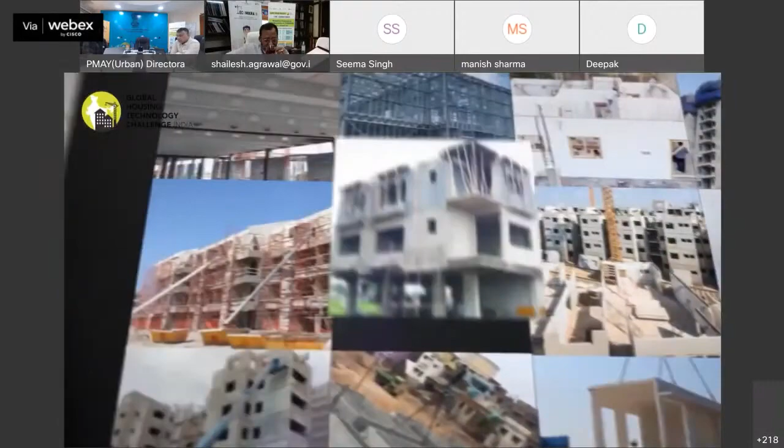Ministry of Housing and Urban Affairs, Government of India, has initiated Global Housing Technology Challenge India to identify and mainstream best available global technologies, so as to bring paradigm shift in the construction sector. 54 innovative technologies put in 6 broad categories were shortlisted during the challenge process. 6 lighthouse projects at 6 locations with 6 distinct technologies are being constructed. A lighthouse project using prefabricated sandwich panel system with 1024 dwelling units in S+8 configurations, along with all basic and social infrastructure facilities, is being constructed in Indore in partnership with the State Government of Madhya Pradesh. The Honorable Prime Minister laid the foundation stone of 6 lighthouse projects, including at Indore, on 1st January 2021.

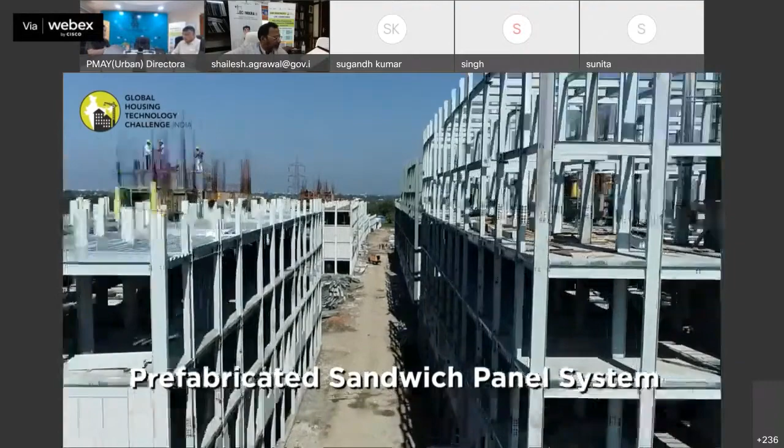Ministry of Housing and Urban Affairs, Government of India, has initiated Global Housing Technology Challenge India to identify and mainstream best available global technologies so as to bring paradigm shift in the construction sector. 54 innovative technologies put in 6 broad categories were shortlisted during the challenge process. 6 lighthouse projects at 6 locations with 6 distinct technologies are being constructed. Lighthouse project using prefabricated sandwich panel system with 1024 dwelling units in S+8 configurations, along with all basic and social infrastructure facilities, is being constructed at Indore in partnership with State Government of Madhya Pradesh. Honorable Prime Minister laid the foundation stone of 6 lighthouse projects, including at Indore, on 1st January 2021.

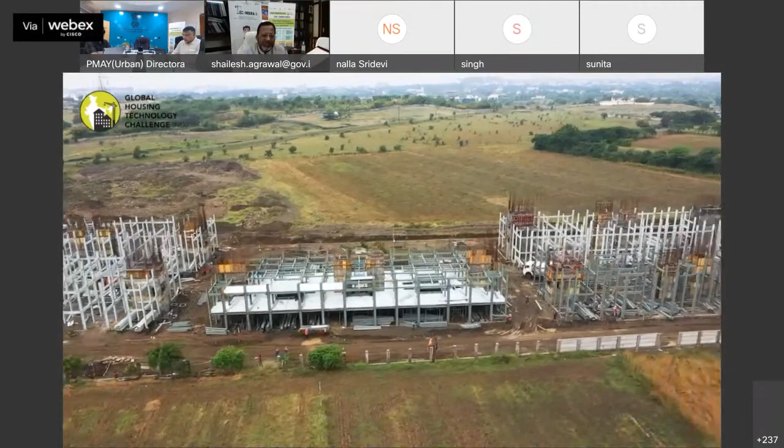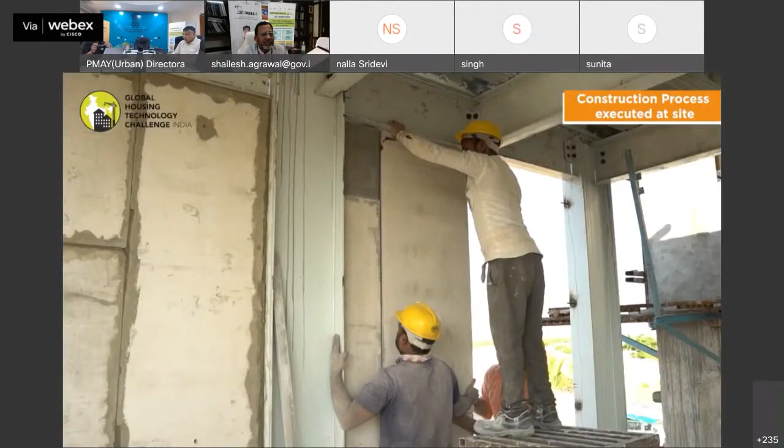In this system, the panels are manufactured at the factory in controlled conditions. Sandwich panels made out of cement or calcium silicate boards and cement mortars with EPS granules balls act as wall panels. These wall panels replace conventional brick masonry and can be used as load-bearing as well as non-load-bearing walls. The panels, having tongue and groove, are joined together for making the wall. These panels can be used both in RCC and steel frame structure. In Indore, the steel frame structure is being used.

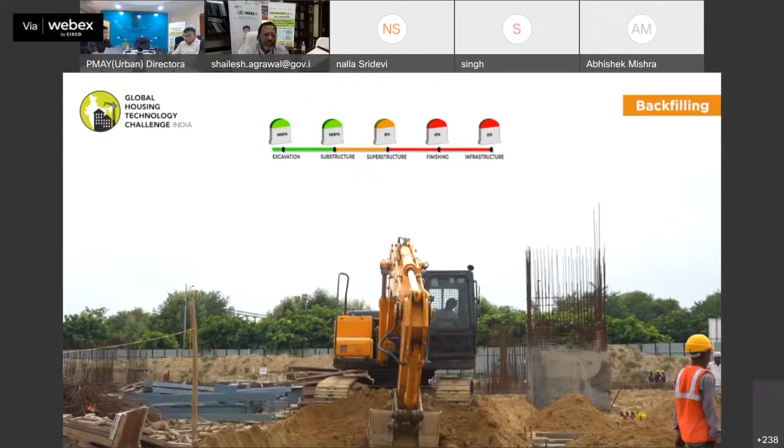Construction of Lighthouse Project Indore was started with excavation of site, followed by laying of plain cement concrete, footing work, erection of stem column as per foundation design, construction of plinth beam, and backfilling to complete the substructure. While foundation works were going on for all towers, the prefabricated steel components as well as sandwich panels were made ready in factory. Superstructure work started in all 8 towers sequentially, involving assembly of column, beams, placement of deck sheets, reinforcement including fixing of electrical and plumbing services.

Concreting of 40 out of 72 slabs have been completed. As the installation of steel structure progressed in different towers, EPS sandwich panels are also being fixed from lower to upper floor. Superstructure framework reached up to 6 floors in 4 towers and 4 floors in other 4 towers. Simultaneously, infrastructure work of drainage, sewerage, underground water tank, erection of compound walls, community center, solid waste management plant, electrical substation, etc. are also going on in full swing. A sample flat with all amenities is ready in Tower 3 for showcasing it to the beneficiaries and other stakeholders.

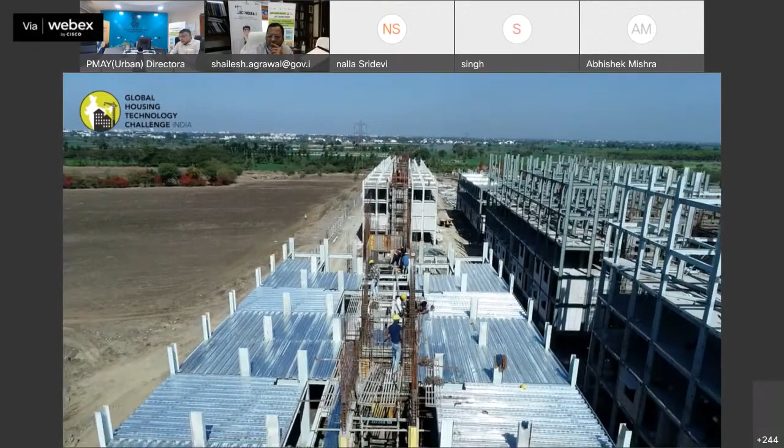The LHP Indore is serving as a live laboratory for learning and dissemination of knowledge. About 350 technocrats and other stakeholders have visited the site to learn the use of innovative technology in real projects at site.

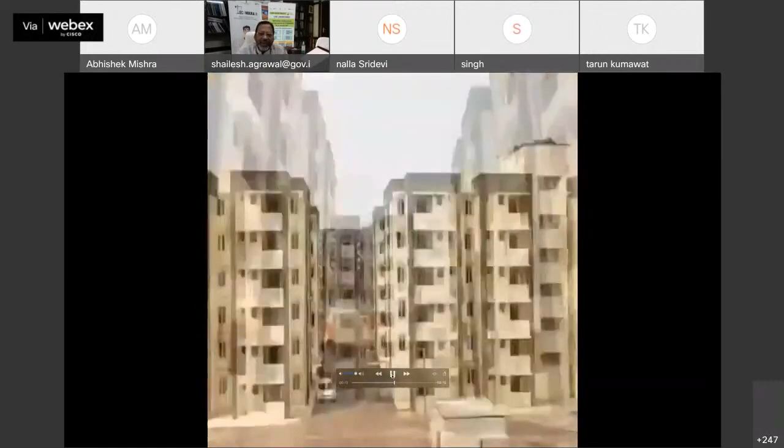This is the Lighthouse Project in Chennai, which was completed in March 2022, and just next week it will be handed over when we release it. The technology used here is the precast construction system, meaning all structural elements are precast components manufactured in a casting yard near the site, then transported and erected at the site. I wanted to show you the efficacy that this project is already completed and being handed over to the beneficiaries in a short span of 12 months, covering 1,152 beneficiaries. With this, let me go to my first lecture.

Let me share this screen with you, and I will ask Vikas if you are able to hear me. Yes sir, we can hear you, sir. Are you able to share? Are you able to see my screen? Yes, we can, sir.

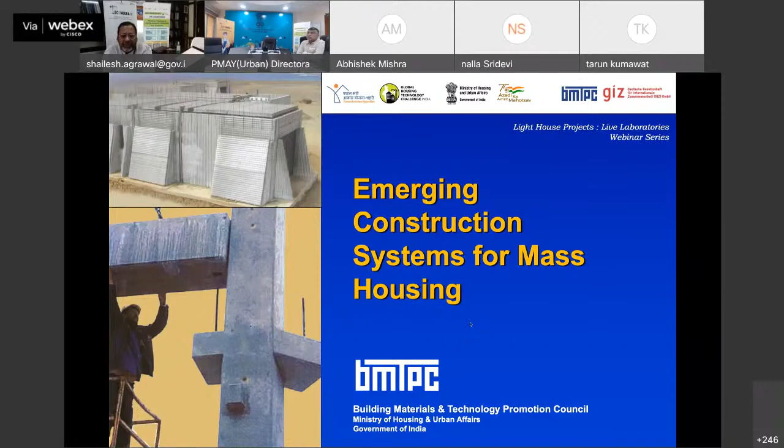So this is webinar number 8, and we are at the Lighthouse Project site Indore. The first lecture is on emerging construction systems for mass housing. I will tell you in simple language about the 6 broad categories and 54 construction systems which we have shortlisted.

This is because the entire Global Housing Technology Challenge India is being organized along with these Lighthouse Projects under Pradhan Mantri Awas Yojana, which has been a huge success. Out of a validated demand of 1.12 crore houses, already 1.213 crore houses have been sanctioned, near to 1 crore houses have already been grounded, and around 6 million houses have already been completed and delivered to beneficiaries. This is one of the largest housing programs ever undertaken across the globe, so we should all feel proud about the success of Pradhan Mantri Awas Yojana.

Under this Pradhan Mantri Awas Yojana, we were running technology sub-mission, and under technology sub-mission this Global Housing Technology Challenge was conducted, and now Lighthouse projects and technology promotion.

Also, through this Pradhan Mantri Awas Yojana, we were able to create several crores of jobs, direct and indirect. As shown in this slide, 213 crore person-days of employment was generated directly through Pradhan Mantri Awas Yojana urban projects, and indirect employment was of the tune of 475 crore, which is equivalent to 76 lakh direct and 170 lakh indirect, meaning more than around 2.5 crore jobs were created due to Pradhan Mantri Awas Yojana.

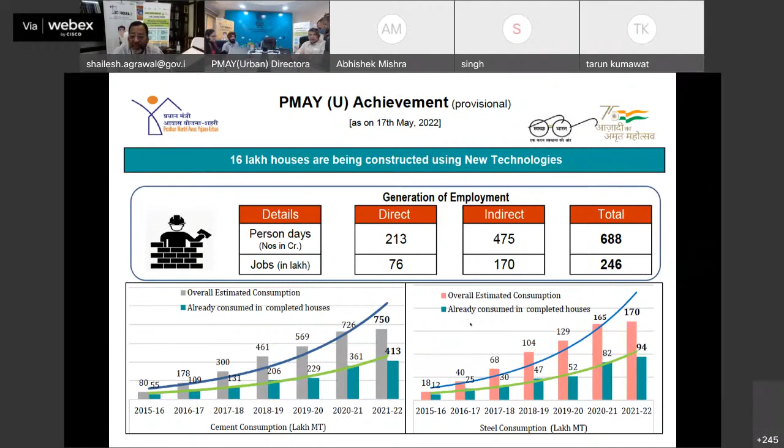Also, the bottom portion of this slide gives you the steel and cement consumption. The cement consumption by the end of this, when all houses are completed, will be 75 million tons, and steel will be 17 million tons. So that was about the Pradhan Mantri Awas Yojana statistics.

So you can just visit this website and get access to all this information, which will not be available otherwise.

Through this Global Housing Technology Challenge, 54 new construction systems were shortlisted, which are divided into 6 broad categories. I will try to explain you these 6 broad categories one by one.

One is 3D volumetric precast concrete construction. Other one is 2D precast concrete construction system. The third is light gauge steel. The fourth is sandwich panel system, also known as drywall construction. Fifth category is monolithic concrete construction, most of you might be aware of it, also called aluminum formwork system. And the last category is the stay-in-place formwork system.

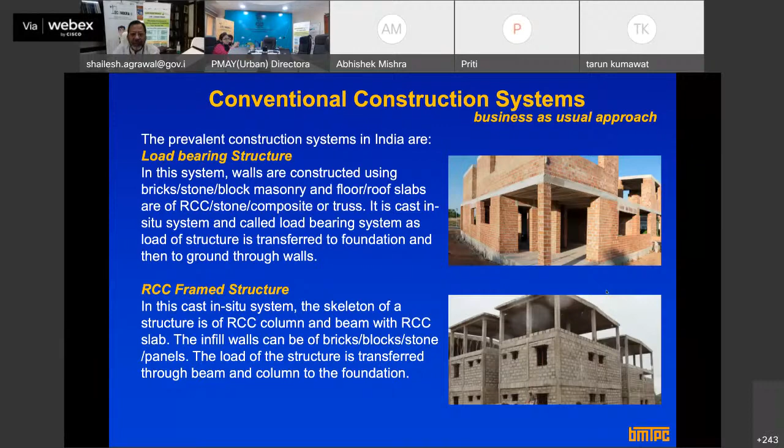First is slow. Most projects, whether big or small, struggle with completion—they are slow track construction. By using these innovative construction systems, you can fast track the construction process. Yesterday we were sharing that in Chennai, a project of 1,152 tenements normally takes 24 to 36 months to complete, but it was completed in 12 months. That's the fast delivery of houses—you can cut down construction time by more than 50%. The moment you cut down construction time, time is money, so you save a whole lot of money as well.

Second is maximum use of natural resources. When you are using red brick, cement, or steel, all these raw materials are based on finite natural resources. The way these materials are used at site, with no control or supervision, there is a whole lot of wastage. Whereas with innovative construction systems, majority of construction activities take place in the factory or under controlled conditions, so naturally you bring in efficiency, productivity, and optimally use your resources. That's why these innovative construction systems are called resource efficient systems.

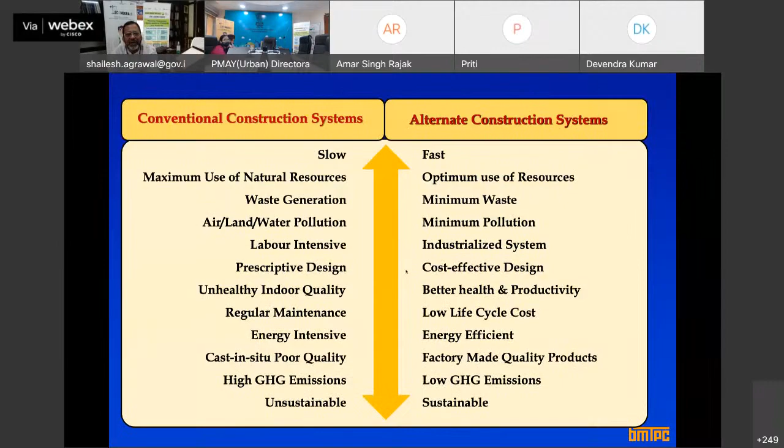So with this background, let me give you those six broad categories which I talked about, and I will try to explain them pictorially. I will show you through pictures what this means.

So first is 3D precast concrete construction, also called 3D precast volumetric construction. Let me explain these words. Precast means something which is not cast at the site, but is cast somewhere else, which can be a factory or a casting plant. So you make the entire room or entire module there.

It comes with different names - it can be the entire house, a module, a room, a toilet, a bathroom, or a small project. So the entire thing comprising of 4 walls, a slab and a floor is cast somewhere else, in a casting yard, and then brought to the site and put one over the other to create these building blocks.

That is why it is called 3D, because instead of making these walls separately, you are making this rectangular volume in the factory or casting yard. That is why it is called 3D precast volumetric construction.

I will show you that this technology we are using in LHP Ranchi. We already conducted a webinar on LHP Lighthouse Projects Ranchi. In the next webinar, if you are able to attend, you will see with your own eyes how these 3D modules are put one over the other to create this building block.

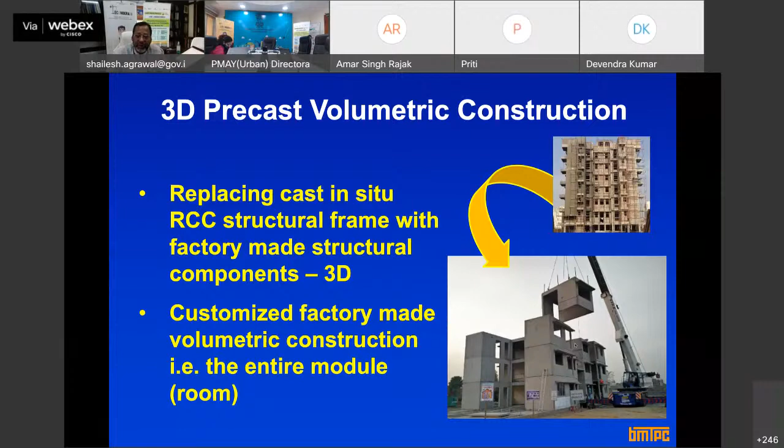Also, when we talk about these systems, people talk about joints and all. Let me tell you, all these joints are carefully designed through proper engineering and testing, so all these joints are monolithic - as good as the conventional joints in a monolithic system.

Through the Global Housing Technology Challenge, we could shortlist 4 technology providers. The project we are doing in Ranchi is being done by Magicrete Building Solutions, and this is the project. In addition, 3 other technology providers were shortlisted: Ultratech, Modocast, and Katerra.

This is essentially the process of 3D volumetric construction. First you create a mold depending upon your customized size, then put a reinforcement cage in that mold, then do the concreting. Once concreting is done, you remove the mold, and the module is ready to be transported to site, then placed on the already laid foundation or already laid slab. That module is kept and jointed through nut bolts and wet jointing - whole lot of jointing systems are available - and then you put one over the other to create multi-story buildings.

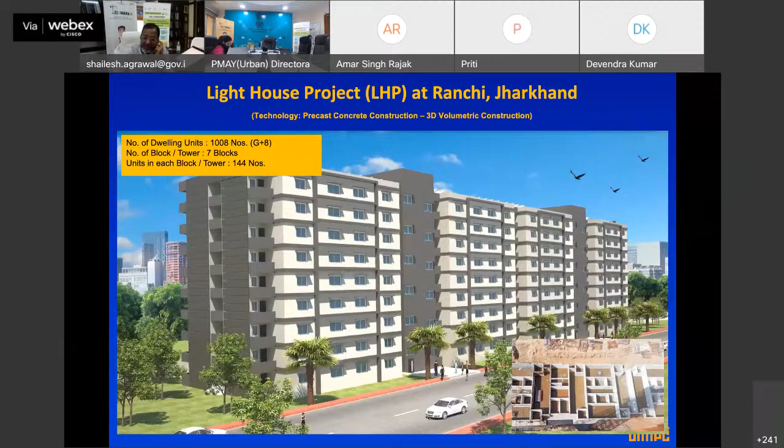This is the Jharkhand project I am talking about, and they have already created these 3D modules, which are being put at the site one over the other. This is that project at Ranchi. You can get details of this project by visiting the GHTC website as well. Now let's move to the next category.

Next category is similar to the first category. The only difference is there we were making the entire building, module, or room. Here, we are making all 4 walls separately. So walls, slabs, beams, columns, any structural element is made separately, and that is why it is called 2D. There we are making the entire volume; here we are making the planar element, meaning a 2D element.

So it can be facade, beam, column, or slab. These elements are made in the factory, and this is the technology used in the Chennai project. Just adjacent to the project site, they set up a construction casting yard, and in that yard, all these beams, columns, wall panels, slabs, and staircases were cast and then brought to site and erected, assembled, and through wet jointing, joined monolithically to create a monolithic structure. This is precast concrete construction system, and it is one of the most popular technologies in our country at present.

You can see here, name any element, you can have hollow core slabs also, just to reduce the weight of your walls and slab. So any element - wall element, solid slab element, this kind of spandrel with slab and parapet - you can have staircase, you can have wall panels. All these are being cast in the casting yard.

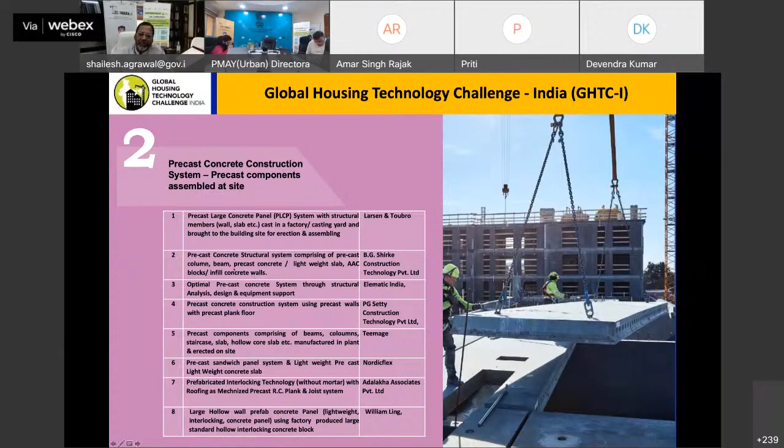All these details, if you want to get information about these companies - their emails, contact addresses, presentations - all are available on the GHTC website. So you can get access to all this information through the website. And this is the project in Chennai. I showed you the picture, and I showed you the small 30-second video also, and you can see how beautiful it looks.

1,152 houses in 12 months were constructed using this technology.

Let's move to the third category. The first 2 categories pertain to reinforced concrete construction, where concrete structural elements are precast, meaning made in the factory or casting yard. Now here, instead of RCC, we are using steel beams and columns. The only difference is steel beam and column, and that is why it is called pre-engineered.

You might have known this word pre-engineered. It means something done beforehand - not done at the site, but pre-engineered. Before, you decide everything, the sizes of columns and all, and then from the factory produce those columns and beams and elements, bring them to the site, and then erect them.

You might have heard this word used in industrial structures. Most industries use this pre-engineered steel structural system. Now we are trying to promote pre-engineered buildings in the residential sector for housing also, because the manufacturing and technology of steel has advanced, and now we have built-up sections that make it possible to have any kind of rectangular, hollow, or square shape, which makes it usable for residential construction as well.

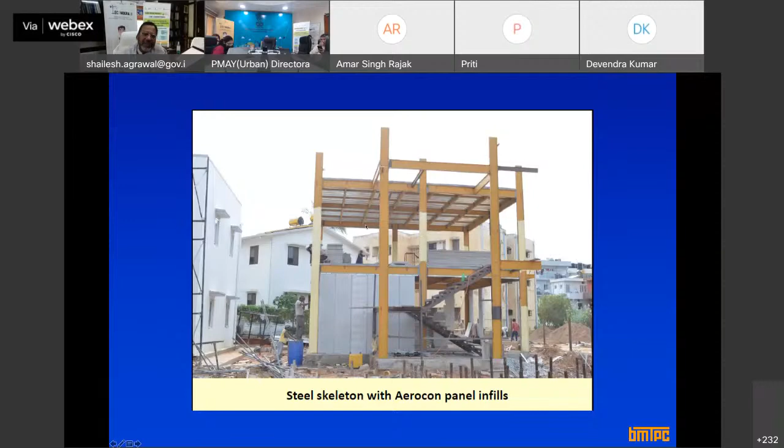So as per your requirement, suiting to your need, you can have this kind of wall. The idea here is that this is called pre-engineered steel structural system. We are replacing the RCC skeleton with this factory-made steel skeleton.

There is another category which we have clubbed with the first one I showed: steel pre-engineered structural system and light gauge steel structural system. This light gauge steel structural system is particularly suited to 4-story structures only. This technology is recommended only up to G+3 structure.

The difference between this and this is here you have built-up sections which are not galvanized. These are heavy sections, but here this is hot rolled steel. Understand, this pre-engineered steel structural system uses hot rolled steel, and here this is called cold form steel, which is very lightweight. So you have a very thin section, and these sections are galvanized. Galvanization means they are corrosion proof.

So these panels, what you see this white or gray thing here, are made in the factory, and being very light in weight, they can be easily lifted by one person. So you just put these panels one over the other, side by side, to create the entire wall. And in a similar fashion, you can also put them in the floor as well.

So this is called light gauge, but this is recommended only up to 4 stories. Although abroad it is being used up to 8 stories, in our country, looking at our geoclimatic profile, we have recommended only up to G+3 story.

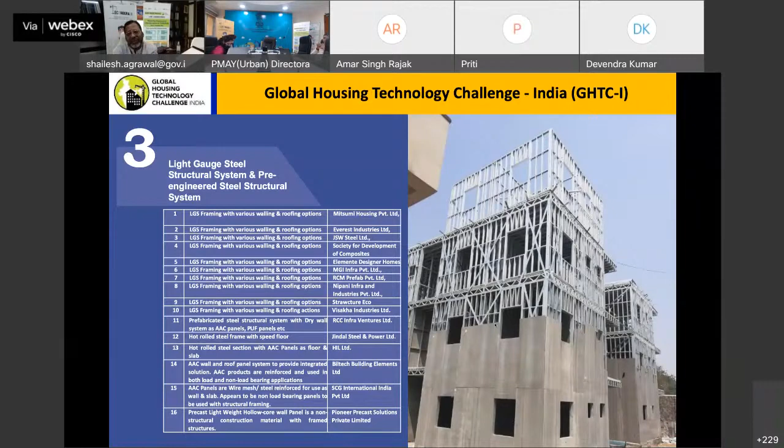And the hollow space in between can be left as it is, or it can be filled with any material. It can be rock wool, mineral wool, lightweight concrete, or a concrete of lower grade M10 or M5. Just to avoid hollowness in the structure, you can fill it with any of this material.

As I told you, this project is being done in Agartala, and what you can see in the right-hand side, bottommost, is that thing I was talking about. So that skeleton is of steel, and the wall panel is of light gauge, which you see here. 1,000 houses in Agartala are being made with this.

Agartala falls in seismic zone 5, and being in that zone, it is highly seismically prone, a very high damage risk zone. There, this steel structure provides excellent earthquake resistance, and light gauge steel is lightweight, so the lighter the weight, the better the seismic resistance. So this technology is quite useful and effective in places with high damage risk due to earthquake.

Let's move to the next category. This is also a very popular system in our country: dry wall construction.

You all know how walls are being made. What you see on the left-hand side is the wall construction in our country. If you are a civil engineer or architect, normally bricklaying is done either in English bond or Flemish bond, making a one brick wall or half brick wall. Then we first soak the brick in water.

Then we put a layer of mortar, then we put a brick, and that's how over a scaffolding and platform we create the entire wall. Then we do the plastering.

How about instead of making a wall like this, we get the wall made in the factory and just erect or install that wall at our site. That's called dry wall construction, and there are a whole lot of options available. I will just show you through pictures.

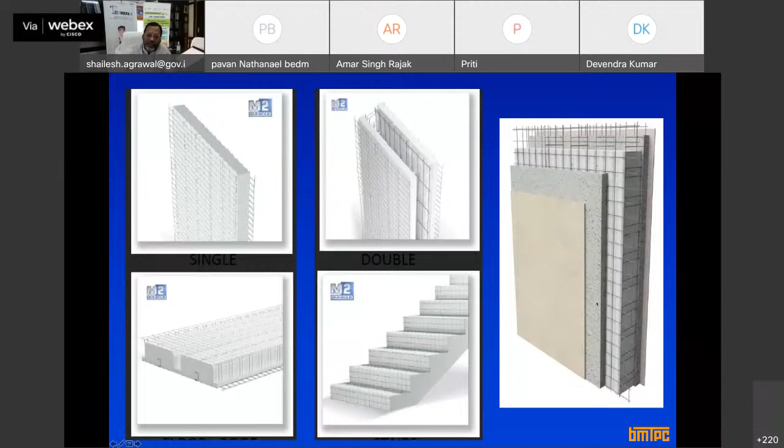There were around 9 companies which were shortlisted, and the project we are discussing today is being done by Rising Japan in association with KPR Projects - this is the technology we are using. So instead of this EPS core panel, what we are using here is wall and slab with EPS cement sandwich panel.

EPS sandwich panel system means the concrete we are using in the core is lightweight concrete, made of EPS beads, fly ash, and cement. This is also known as aerated concrete. So it's a lightweight concrete which is sandwiched between two calcium silicate boards. In fact, I will explain this technology to you in detail.

This is the technology we are using in Indore, and the Indore structure is G+8. This is used as an infill wall, and the structural skeleton is steel - RCC steel beams and columns. This EPS cement sandwich panel can also be used for load bearing application, but only up to G+1 story. In addition to this technology, there were 8 other technology providers which are listed here.

You can see Bhargav Beardsell. Beardsell produces EPS core panel. Bhargav produces EPS sandwich panel system. Then there are other host of companies which are into this EPS core panel systems.

And this is that Indore project. I will be discussing this in detail. So this is that panel which you see on the left-hand side - this is an EPS cement panel. Why is it called EPS cement panel? Because the core is of EPS concrete, aerated concrete. So that core is aerated concrete, and on both sides you have calcium silicate board.

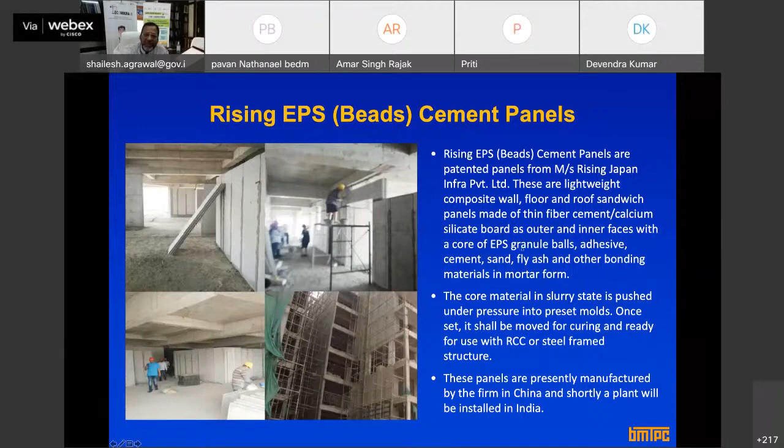These are lightweight composite walls, where you can see floors and roofs - sandwich panels made of thin fiber calcium silicate board on both sides, and the core is of EPS granule balls. So this is EPS beads, then cement, sand, and fly ash. Okay, let's move to the next category.

Next is, some of you might be knowing, Mivan system. Mivan was the name of the company which started this formwork system here. Otherwise its proper name is aluminum formwork system, or we have given it another nomenclature, monolithic, because this kind of formwork produces a monolithic construction. That is why it is called monolithic concrete construction.

This system is also one of the most popular systems in our country right now. Most of the projects being done by developers, real estate developers, are being done with this kind of formwork system.

This formwork system is nothing but, in a typical construction of RCC frame, what you have is formwork for columns, beam, and slab. So formwork, it's a formwork of steel or plywood, which gives the form to your concrete. If you want to create a vertical element of column, you put a formwork, rectangular formwork, and then put a reinforcement cage and do the concreting, and then remove the formwork. And then similarly for slab, and for beam and slab, you put that formwork and then remove it.

So instead of making these beam, column, slab separately, what about making the entire building together by putting the formwork for the entire module or for the entire room together? That is called monolithic concrete construction or aluminum formwork.

This is a customized formwork which is made in the factory. Depending upon your project, first the project requirements and the layout and plan of your project will be considered or studied, and based on that, this formwork is customized and manufactured in the factory. Then it is brought to the site, and you put the reinforcement cage and do the casting in a single pour to create all 4 walls and slab together. So the entire room can be made in one single pour by pouring the concrete in one go, and then on the third day, nowadays in 3 days, you can remove this formwork and go to the next floor.

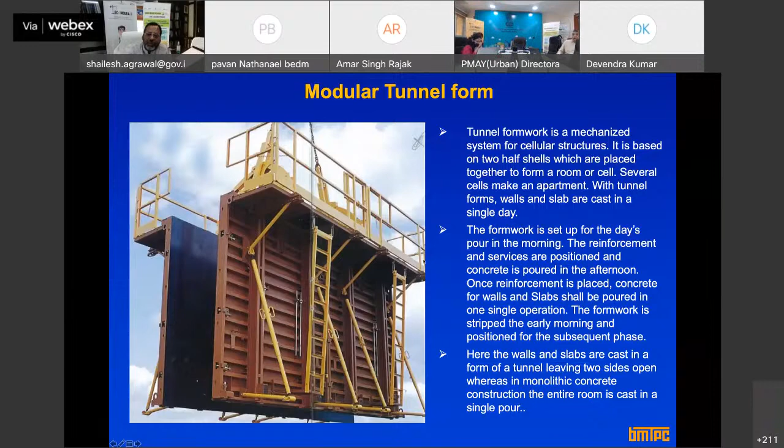So you put reinforcement, then the walls and slabs are cast together, and the outer walls, smaller walls, are filled with infill walls. This is called modular tunnel form, and is being used in LHP project at Indore and at Rajkot. Now let's move to the last category.

The last category is also a kind of formwork system, but it is called stay-in-place formwork system. You all might have understood by now what I mean by formwork system. Typically it means that you put formwork to create a particular shape, whether it's a beam or column, and then later that formwork is removed. But what about when the formwork is left in the structure, or stays with the structure to later act as part of the structure? Then it is called stay-in-place formwork system.

So the earlier formwork is just used to give form or shape to your building elements, beam or column. Here, the formwork is used not only to give shape to your wall, beam or column, but it also stays with the structure to later act as part of it, and that is why it is called stay-in-place formwork system.

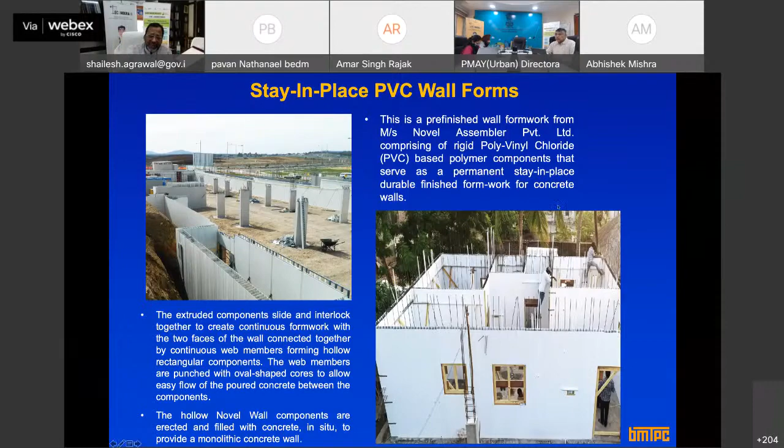This is that project I was talking about in Lucknow. What you see in the bottom-most right-hand portion is the structure skeleton I was talking about - that skeleton is of steel, beam and columns, and later the walls are made with this PVC wall form. It is called PVC wall form because the skin facing sheets are of PVC.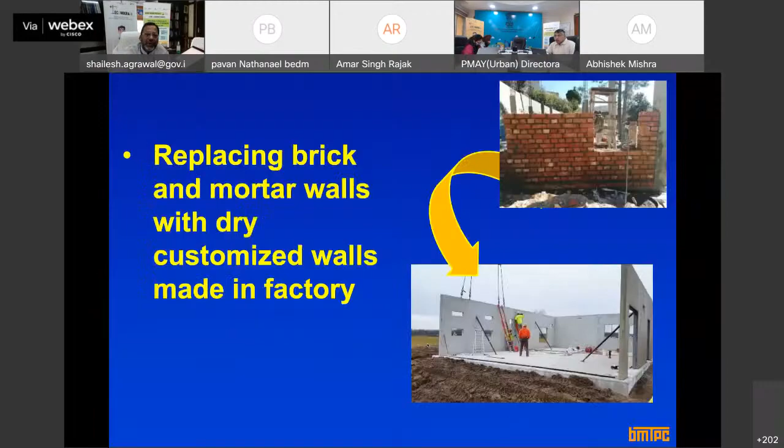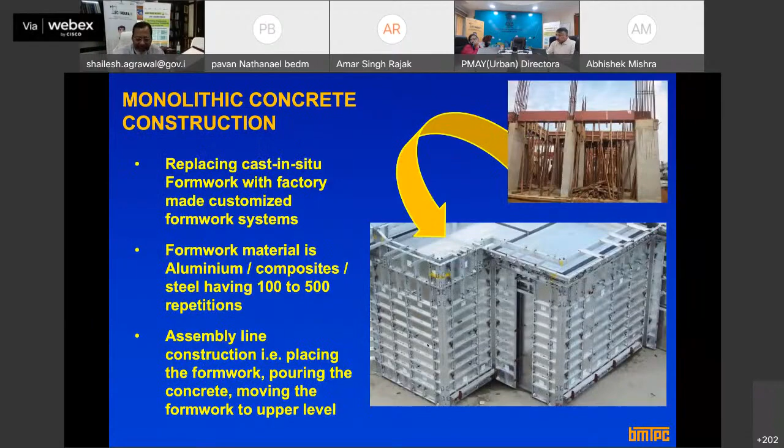With this, I have introduced all 6 categories very quickly, pictorially. If you want to know more about these 6 categories, we have created a film, an audiovisual film, on all these categories. You can visit the YouTube channel of BMTPC, or go to the GHTC website and look at those films. We have created them in a pedagogical form so you can understand the various intricacies of these categories.

We are also working hand in hand with the state governments, and most state governments are now using these innovative technologies. In fact, MP earlier, and Chhattisgarh, which was part of MP, started using this innovative construction. They used precast concrete construction, and one of the largest precast concrete construction projects under PMAY was done in Raipur. MP is slightly slow now, but other states are coming forward and adopting these technologies.

Being in government, one of the major impediments to promoting these technologies is the absence of a schedule of rates and specifications. So what we have done is work hand in hand with CPWD, and for all these 54 technologies we talked about, CPWD has already approved them. They have also brought out the schedule of rates for these technologies, so they can be used by all government departments, irrespective of their locations.

Also, the Ministry of Housing and Urban Affairs and CPWD have both come out with official circulars stating that these 54 technologies essentially need to be used in future projects of all state governments.

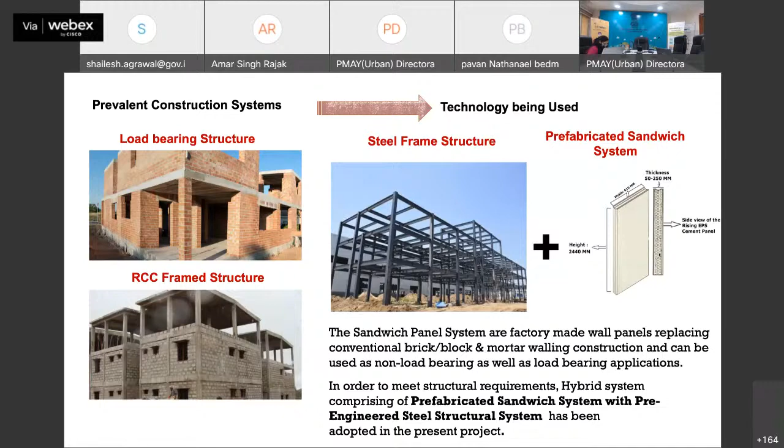And for the wall, we are using this innovative technology called cement EPS panel. As I explained, these are sandwich panel systems where you have two facing sheets which are calcium silicate board, and in between you have lightweight concrete. This is a special concrete made with EPS balls, cement, and fly ash - so we are not using coarse aggregate. Coarse aggregates are being replaced by EPS beads, which is why it is called lightweight concrete.

For the slab, the foundation is conventional RCC footing, and wherever we have staircase and lift wells, we are using RCC shear walls. This is the beam and column system. Then for the slabs or floors, we are using deck slab, which essentially comprises a deck sheet - a profiled galvanized steel sheet over which nominal reinforcement and 75mm of concrete is laid. So this slab can be laid pretty fast, and that kind of slab is being used here.

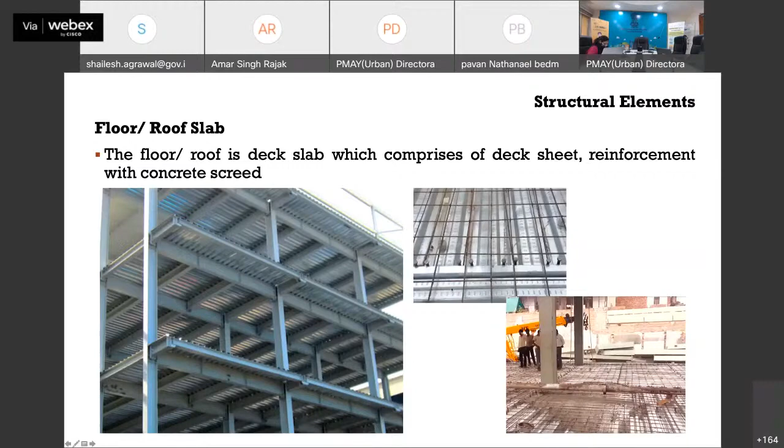And for walling, we are using this innovative prefabricated sandwich panel system. This particular panel is a patented technology of Rising Japan, known as Rising Cement panels. It's called Rising Cement EPS panel because the core is EPS lightweight concrete, comprising EPS granules, cement, sand, and fly ash, and this core is sandwiched between two calcium silicate boards.

The width of this panel is around 2 feet, and the height is 2.44 meters. So if you have a 3 meter height, you have to cut one panel and put it together, using a slide and lock arrangement. You erect these panels side by side to create the entire wall, and later these joints are filled with cement slurry. There is no need to plaster after this. This is a typical factory setup - there are two factories right now.

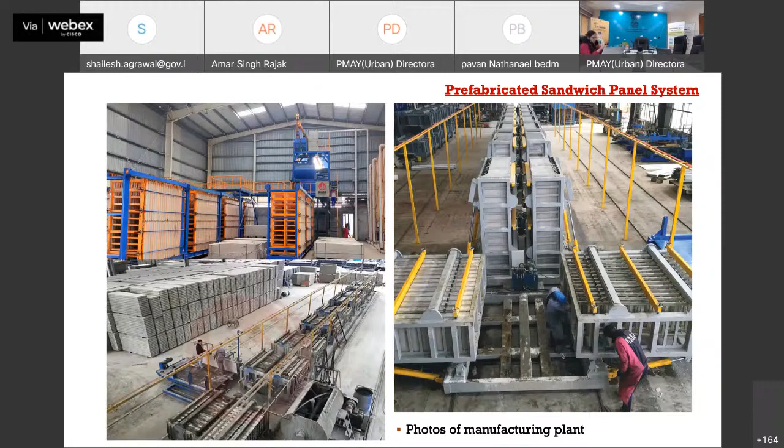One is in Pune and one is in Nagpur, from where these panels are being manufactured and then brought to the site. This is the typical detail of this panel.

You can see the height of the panel is 2.44 meter. The width is 600 mm, and what you see - this lighter core is the special concrete which I just talked to you about.

The thickness is 50 to 250 mm. Since it is customized, as per your requirement, in Indore, the thickness of panel used is 120 mm for external wall and 90 mm for internal wall.

Just imagine the typical construction, we have a 9 inch wall or 230 mm wall. That wall is being replaced by a relatively thin wall of better durability and better quality product. By reducing that wall thickness, we get more carpet area or more space inside the house for the same built up area. So that is another advantage.

When we are talking about these panels, since they are customized, wherever you have a corner, L joints, T joints, or any corners, those corner elements are also customized and made in the factory, and they are also delivered to you. So at the joint, you can put those panels without any difficulty.

These panels are lightweight, so they can be easily handled by one or two people manually. You just bring them to the site, and over the already erected dowel bars and all, you can put these panels side by side to each other to create the entire wall panel.

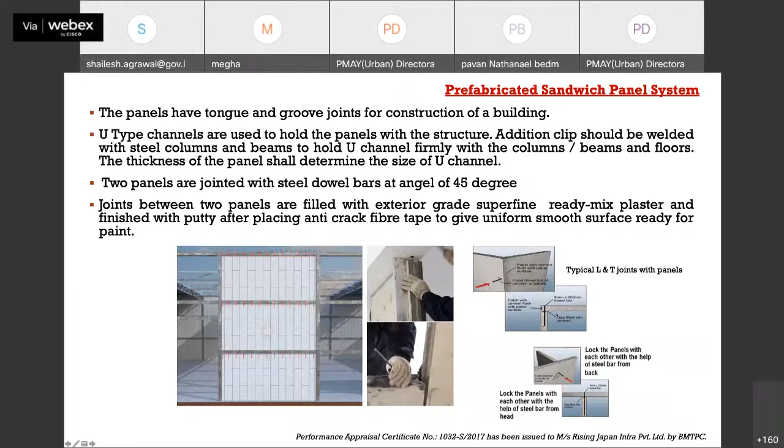I have a video also which I will show you. Wherever you have a T joint or L joint, there also you have specialized elements created, and those elements can be put at those corner conditions also.

This is various stages. This is the sandwich panel system. First you create a skeleton, then over the skeleton you put a deck slab. Then you do concreting, and then you put this panel like this.

Once this panel is put, the building looks like this, and this is a deck sheet. Then we are having a false roof here, a false ceiling also. So this is a false ceiling.

These are the various stages. First you erect the structure, then you put the deck slab, and then you put this dry wall, the walling system, to create the structure.

I will skip this slide because we are running short of time. This project is being executed by KPR project. This is the implementing agency, and the technology provider is Rising Japan. As I told you, this is a brand new technology being used at such a large scale in India for the first time. Being lightweight concrete, this gives excellent thermal comfort, and being light in weight, it also reduces the overall load of the building and gives you a cost-effective design.

This also I will skip because in the last lecture I discussed this in detail.

All these projects are being awarded on a design and build basis, or EPC contracting system is being used. So there the design has to be done by the agency, and when we do the design, we have to do it comprehensively, taking into account the geo profile of the location.

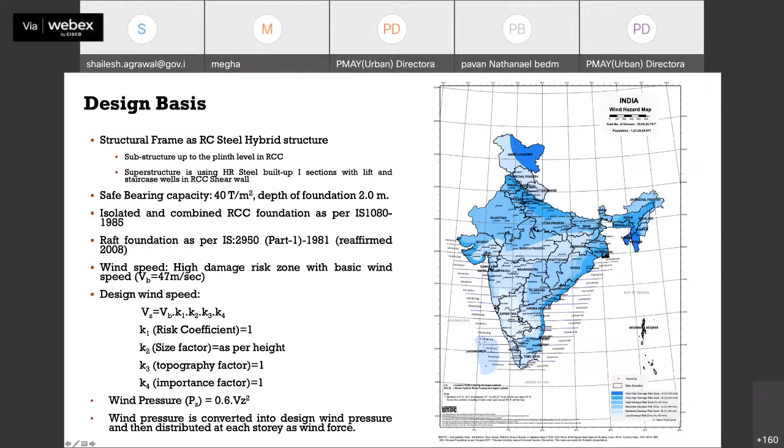So for Indore, this is the seismic zone map. This is a wind hazard zone map of the Indore region, and you can see Indore falls in a wind speed high damage risk zone, which is 47 meters per second. Similarly, for earthquake, fortunately, the seismic zone is 3, which is a moderate damage risk zone.

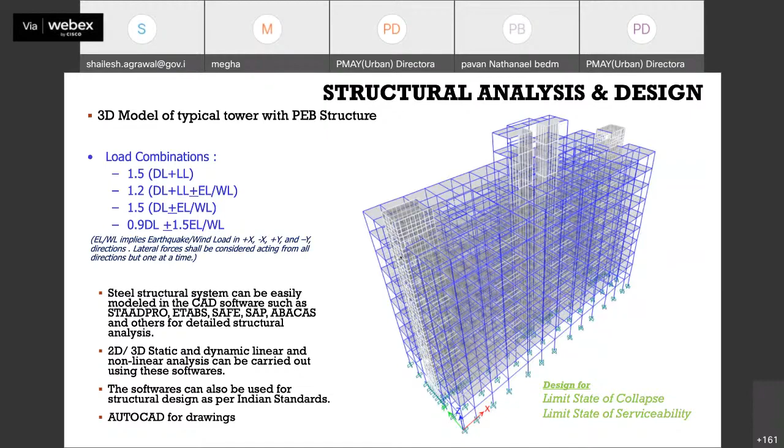So depending upon that, the entire building is designed, and then that design is approved by the ministry. Then only it can be implemented. The structural analysis is done, the entire building is modeled through computer-aided design software, the design is finalized, and then the drawings are prepared for construction purposes. I will not show you all these things in detail; I will just show you through pictures to make it more interesting.

So this is typical: whenever you are doing a project of such a big scale, instead of relying on RMC or other sources, it's better to have your own batching plant. So the agency has put a batching plant at the site itself. By putting a batching plant, you can actually optimize the material quantities - exact quantities of cement, aggregate, and everything can be measured and fed to get the desired quality of concrete and other materials.

At each site we have also established a quality control laboratory comprising molds, compression testing machines, ovens, sieve sizes, and all to have quality control and quality assurance. Also, for all these projects, there is IIT Madras's TPIMA, which is a third party inspection and monitoring agency, monitoring all these projects as a third party.

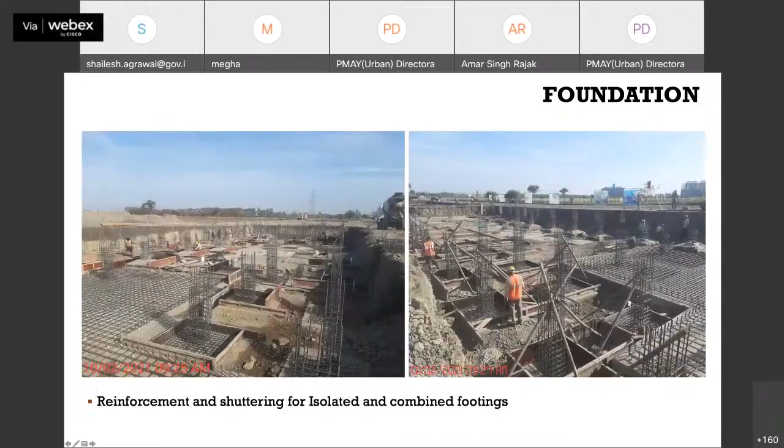So this is what a typical foundation looks like. For laying the foundation, since we have isolated footings, you can see the reinforcement of that isolated footing being put. Wherever we have a lift well or staircase well, we are making RCC shear walls instead of isolated footing, because the entire core has to go there.

These shear walls are being put with this kind of Kota stone, so as to minimize the ingress of water, because the chloride content in the soil is higher. So just to avoid moisture content mixing in, Kota stone is being put over that wall.

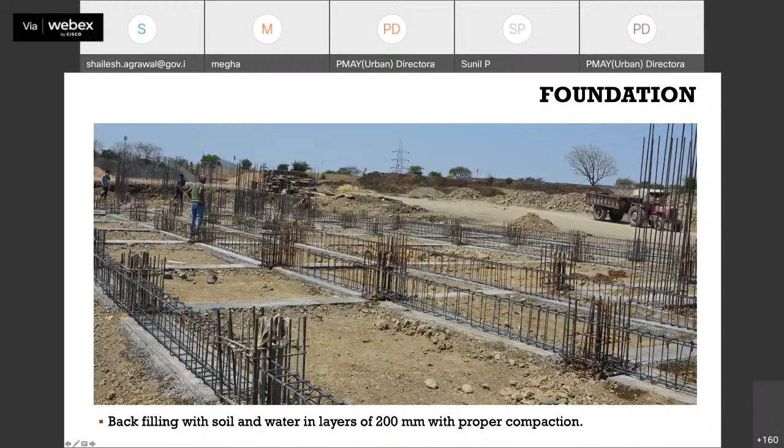So this is the isolated footing being cast, and then once we come to the plinth level, we have to put a plinth beam so that all the RCC footings are connected together.

At the plinth level itself, wherever those steel columns are coming, you have to put anchor bolts, and anchor bolts are put with a template. Then you have this kind of sleeve, in which the anchor bolts are cast along with the plinth beam. Since they are made with a template, in the factory where we are making those columns, they come with a base plate, and that base plate is just put over this and connected with nut and bolts to create the column.

So you might have understood: first we have RCC footing, then over the RCC footing we have a plinth beam, and wherever columns are coming, we insert anchor bolts cast with this plinth beam, and then over this we put the steel columns. So you can see this is the plinth beam.

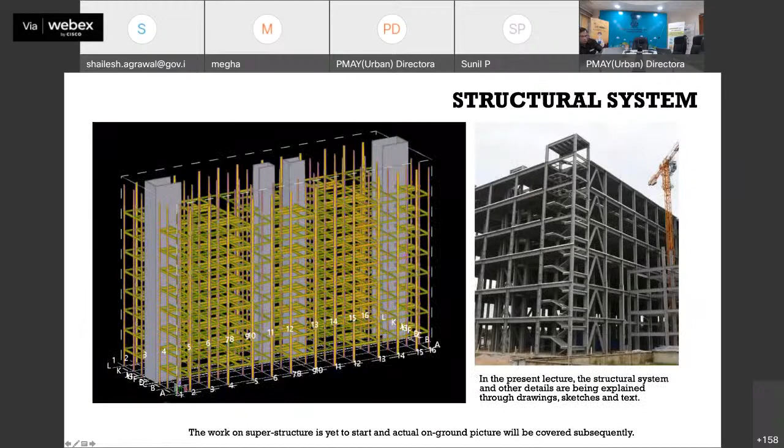This also I will not show you in detail. This is the typical construction, explained to you - this is how it is being done. This is a steel section, and these are the bonding sections.

We are running short of time, but regarding services, since these questions are asked in every lecture: for services you have to use special chiseling equipment, just like in your typical conventional project.

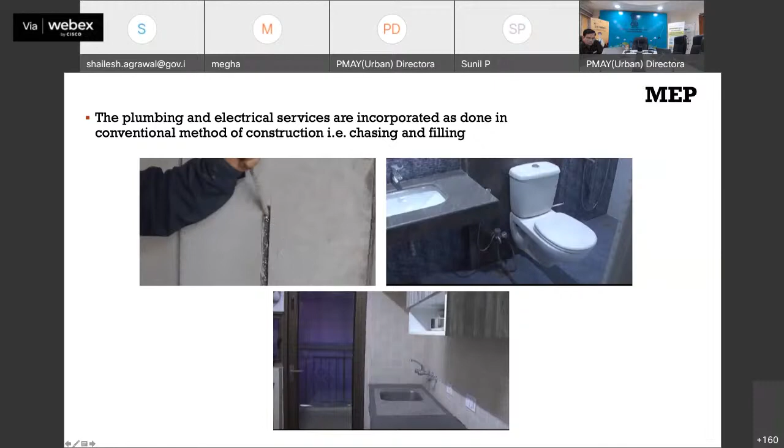Similarly, you can put any kind of services - wash basins, seats, closets, faucets, platforms. Everything can be done with these wall panels and this kind of system. The only thing is you have to use special equipment for chiseling and cutting those panels.

Other finishing items used are pressed steel doors and flush shutters. We are also using UPVC frames for windows, vitrified tiles for all the rooms, and Kota stone for common areas. As I told you, there are other infrastructure facilities also.

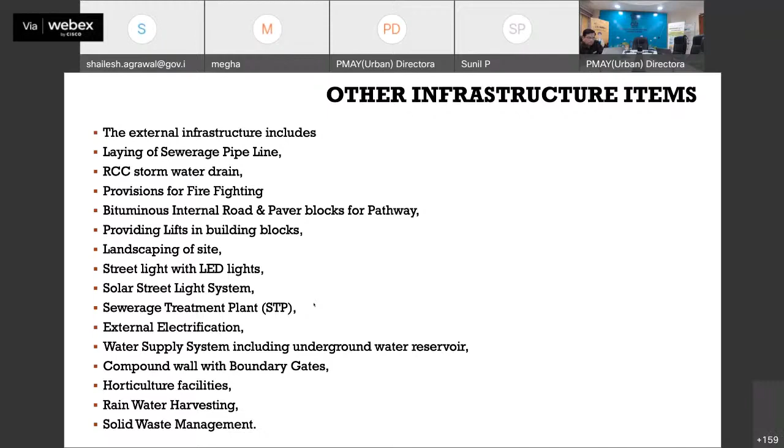We are using STP, solid waste management, compound wall, horticulture, and all those things. All the street lights are renewable resources using solar lights. Then wastewater management through wastewater recycling, and that recycled water is used for secondary applications like gardening and flushing purposes. So that is all.

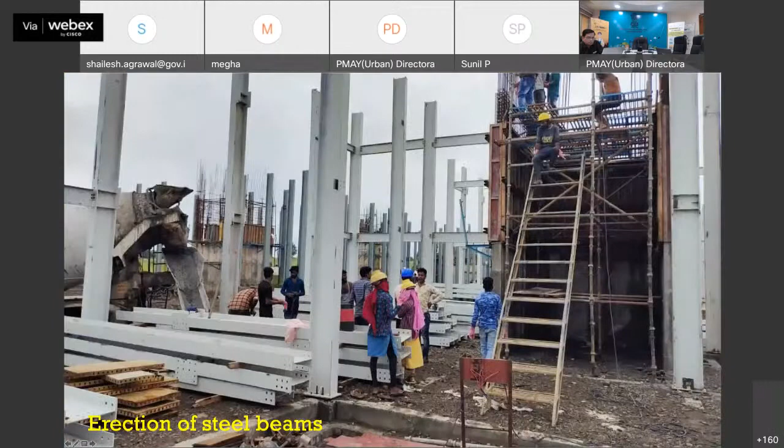Now you can see those beams being put in those places. And what you see here, the complete thing is a lift core well or a staircase well.

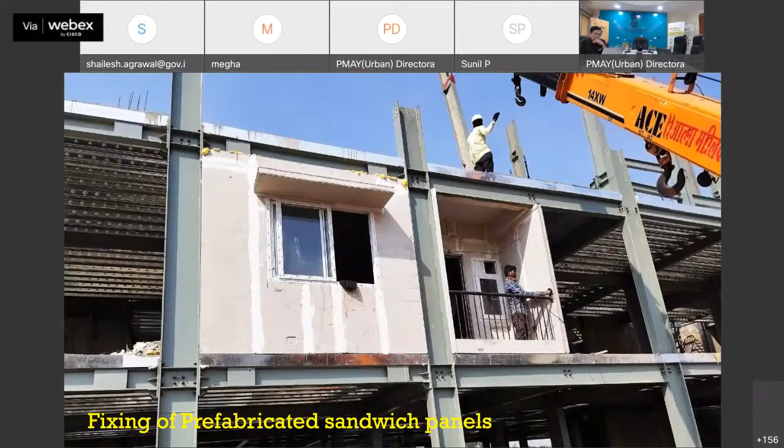You have to put them side by side through a tongue and groove slide and lock arrangement, and this is filled with a slurry. There is a standard operating procedure for how to fix these panels, and normally the workforce at the site is trained in how these panels are installed. With a little bit of training, these panels can be easily and quickly erected.

This is another view of the Indore project. You can see the project is now at an advanced stage of completion. You can even see the sunshades - these sunshades are also made of these panels only.

As I told you, this technology is amenable to all kinds of common facilities prevalent in our country, like UPVC doors and frames and other such things. This is another view you can see.

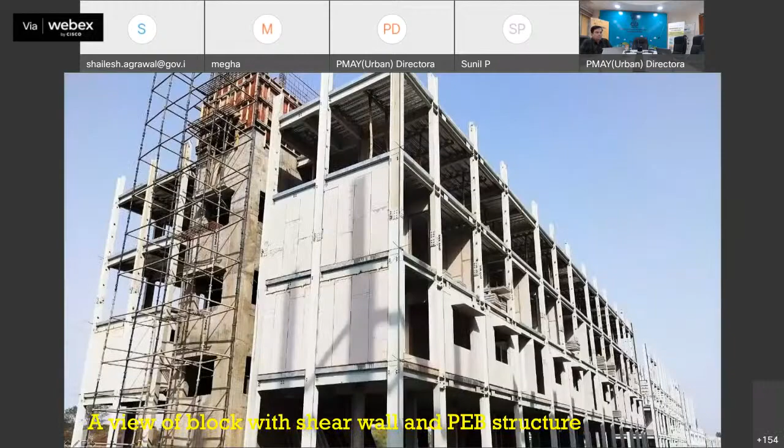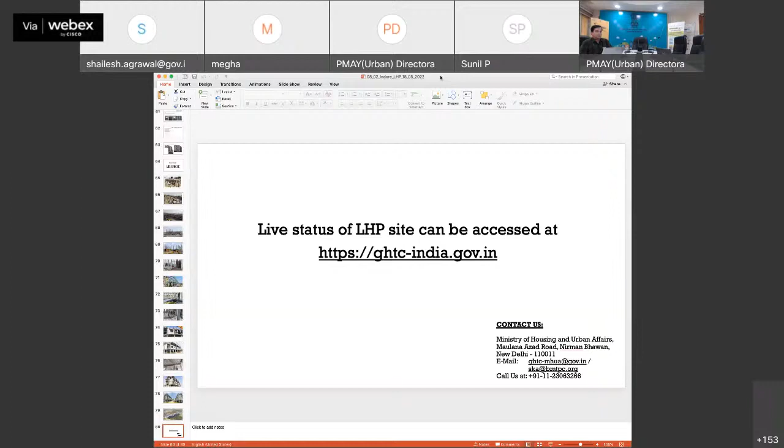I will also quickly show you a 10-minute film which shows in a video how these panels are installed, since you might be interested in that. Let me share my screen with all of you.

Okay. Yeah. So if you are able to see, able to see, you're getting the voice.

Hammer, trowel, electric circular saw, electric drill, infrared level instrument, ruler, accessories, wooden wedge, steel bar, anti-crack tape, cement mortar.

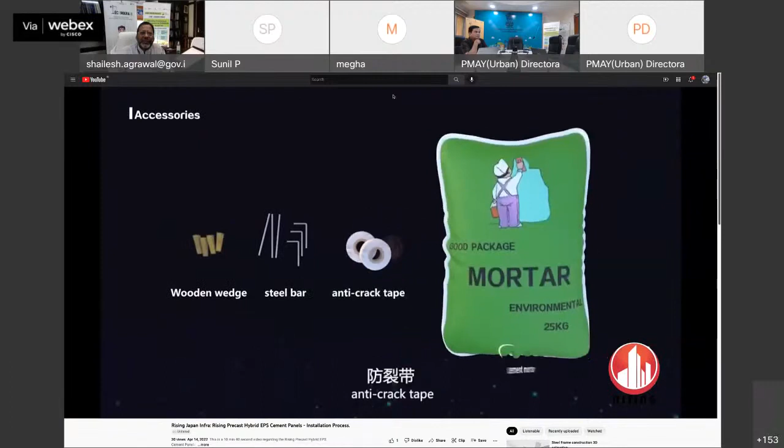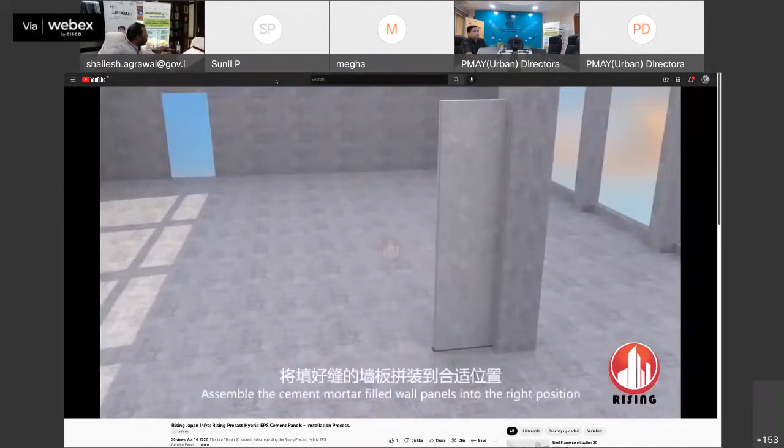Assemble the cement mortar filled wall panels into the right position. Lever on the bottom of the wall floor with an engaging trowel. Make it tight and temporarily fix with wooden wedges. Use an L-type steel bar to reinforce the wall panel and floor ceiling.

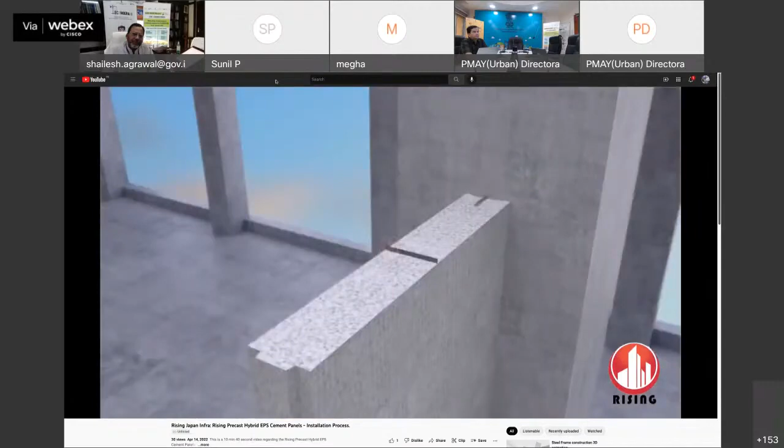Step 4. Cutting. Using an electric saw, cut to the sizes needed. Steel bars of 180mm length by 6 millimeters are required to enter the 45-degree angle into 2 panels.

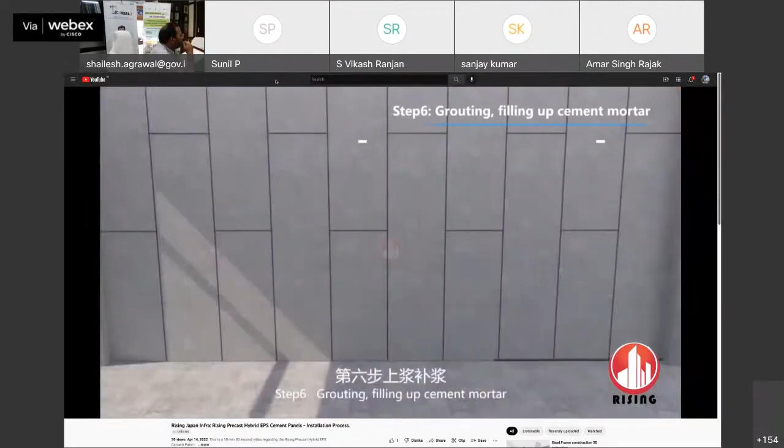Step 6. Grouting. Filling up cement mortar. Step 7. Sticking anti-crack tape.

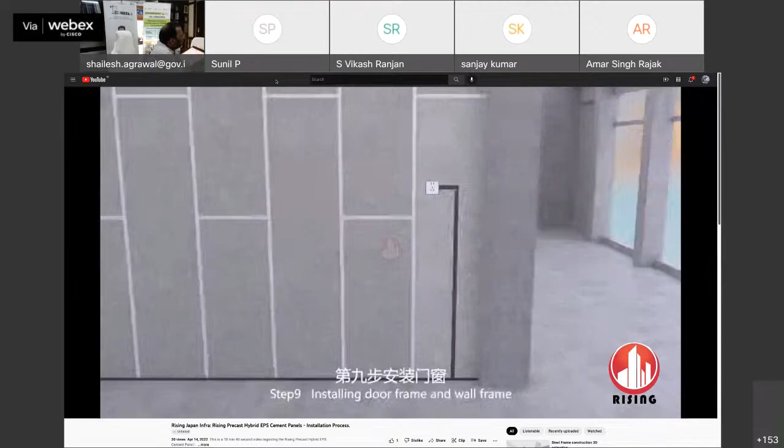Step 9. Installing door frame and wall frame. Reserve enough space according to the size of the door and window. Then install the wall panel.

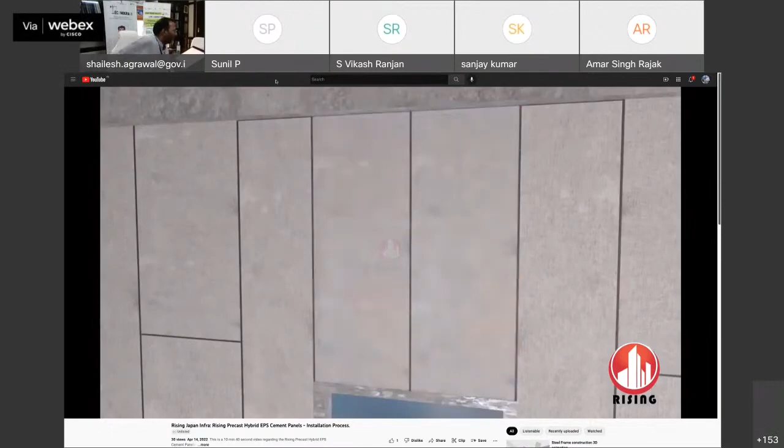Step 10. Decorating the wall surface directly by plaster, wallpaper, tiles, and other painting.

If the height of the wall exceeds 5 meters and the length of the wall exceeds 8 meters, a square bar, H bar, or channel steel should be added correspondingly to strengthen the joint.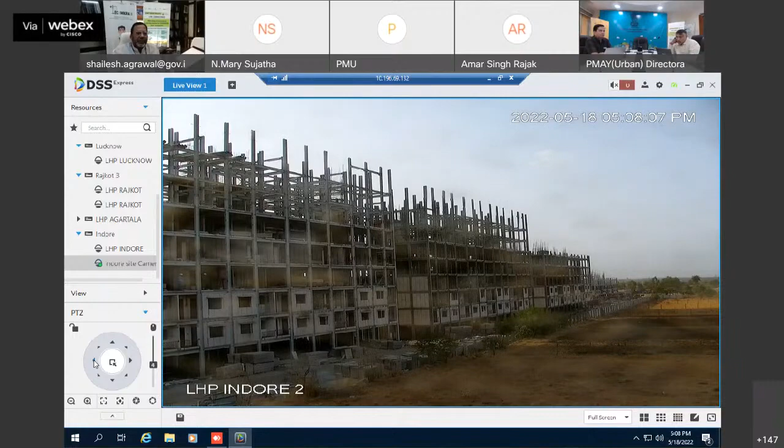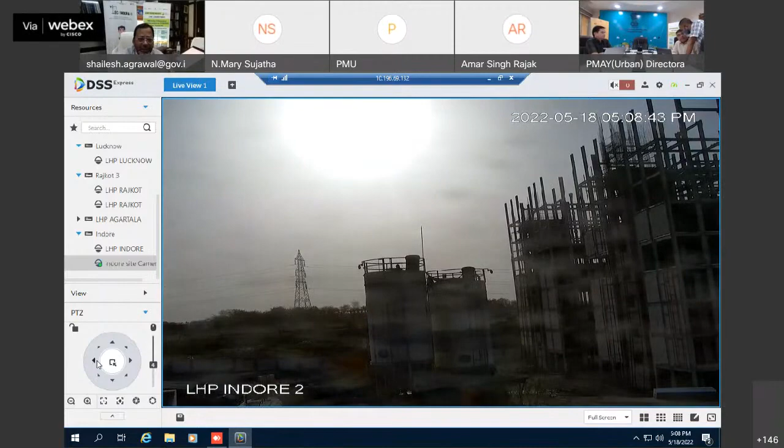Sir, I think maybe somebody from the Indore site can explain what is happening over there and how this is being constructed, or otherwise Shailesh sir can. What you see here are the steel frame skeleton, and the gray thing you see are those panels which we just discussed. If somebody is there on site and can show them from the inside, or show something not covered in the lecture, or give participants exposure to what's happening at the site at present, that will be welcome.

Otherwise, I think Sunil, you only are operating. There is no one there present. Kashinath ji, are you there? If you are there, then please explain. Kashinath is not there, but I think I have been listening to you right from the beginning.

Good evening. You have covered Vinod Chaudhary from KKR, sir. You have done LHP Indore, everything.

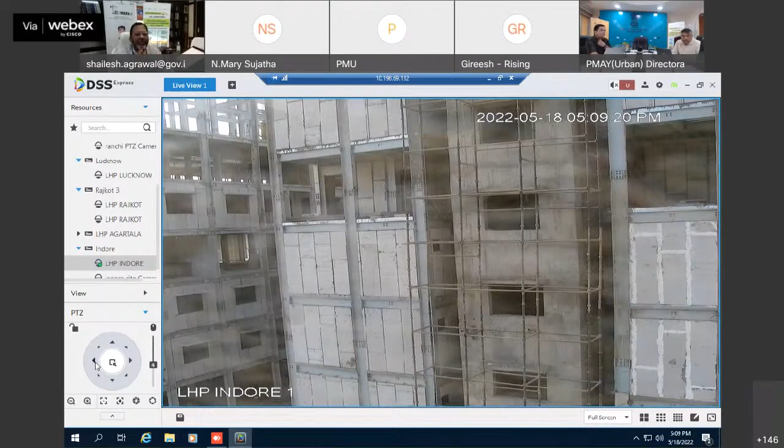This is Ratan Singh ji. Hello, Ratan Singh ji, would you like to add something? Then you are welcome to add.

I think you have done a much better job than any professor could do on the subject, to be very honest. You have covered everything very clearly and in detail. And also, our website is available, which you have already explained to them.

Any questions anybody has, they can write and send an email to us. We'll respond to them immediately. As far as the project is concerned, of course it is running a little late due to various reasons, but we are trying to cover it up. And today, Rajesh is not there because he's not feeling well.

So there was somebody else who was supposed to be there on the site. I do not know why he's not able to listen to you. But basically, what I've noticed is that you have covered almost everything. These are the steel structure, and the EPS panel is being installed. We are targeting that the project should be ready by September, October, as discussed in the last meeting, and more or less everything is as per schedule now.

Okay, okay. Thank you, sir. Thank you, Ratan Singh ji. Ratan Singh ji is a very passionate technology promoter, and he is bringing this technology to India.

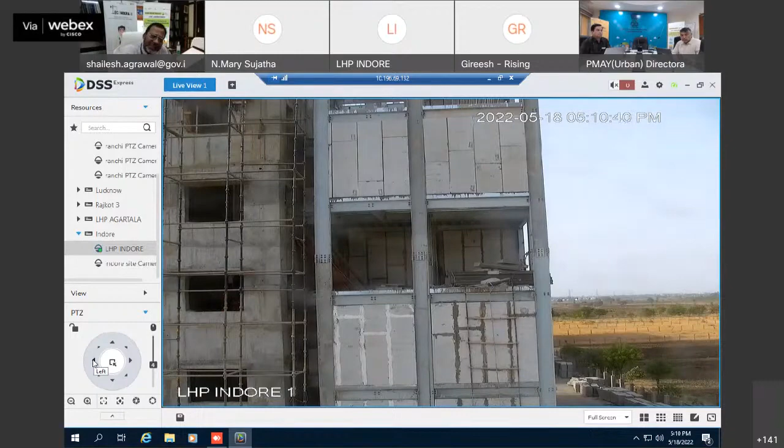Sir, can you explain how you are connecting these panels with these steel columns and beams? Gireesh, can you explain them? We have shown the video, a detailed installation video, in which the first portion, if you see, we have installed in a steel structure, and we have gone up to even three panels height.

Basically, once you put the first panel next to the structure, what we do is insert the bar and then weld the bar with the steel. So this becomes one piece, and also we are using special adhesive between the panel and the bar. So the steel structure and the panel, once left overnight, becomes absolutely one piece, and it's very difficult to remove.

As far as the floor is concerned, traditional bar and cement mortar is used, as shown in the video. So on two sides, we are using the bar and the cement, and the third and fourth side, the immediate roof as well as the side connected with that steel frame, is welded with the steel rod.

Inner panels are interlinked with the bars as shown in normal construction. That's tongue and groove, filled with the mortar, and it becomes one piece.

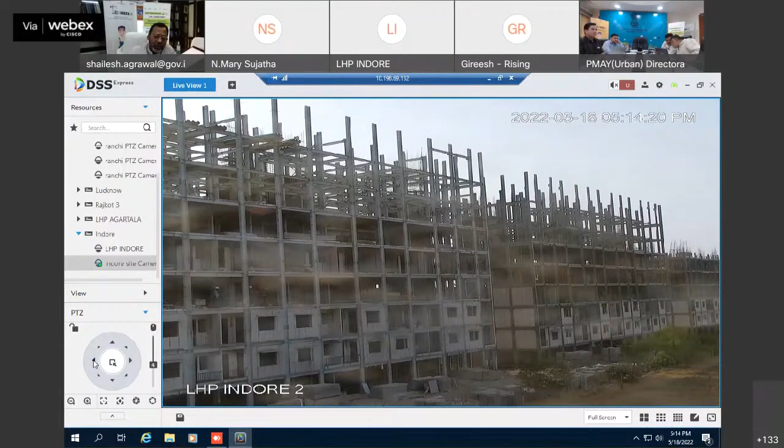So with this technology, that U channel is not to be put. We always advise that there are SOPs given by the technology provider when we deal with this kind of panel, so always use those SOPs. As he explained, it's not advisable or recommended to use that U channel, which is the standard practice for other panels. Each technology has its own installation procedure, and we need to stick to that.

Another thing he told you: because for the first time in India we are using a steel skeleton with this panel, instead of grouting, since you can't grout in steel, you weld it. So wherever we have a column, the vertical connection between the column and the panel is done through welding a steel bar into the column. These are two important takeaways for all of you. And to make you more confident about this technology, it has already been approved by CPWD as well.